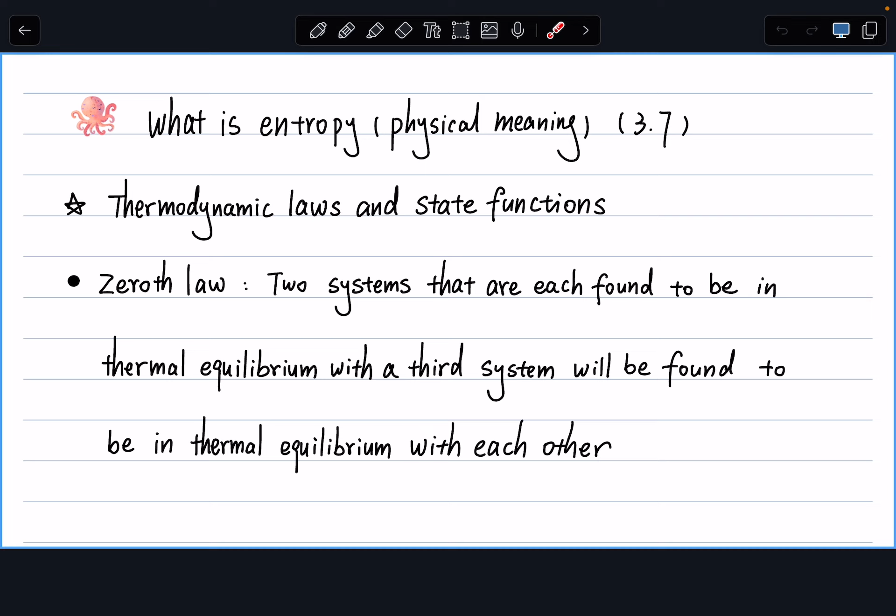And then from these chapters, basically every chapter in 1 to 3, we have one state function relevant to a law of thermodynamics. So these laws of thermodynamics, we just accept them to be true. It's not our job to prove that these laws are correct. So in chapter 1, we went over what we call the zeroth law of thermodynamics, stating 2 systems that are each found to be in thermal equilibrium with a third system will be found to be in thermal equilibrium with each other, right? So in order to better describe the zeroth law, we define temperature.

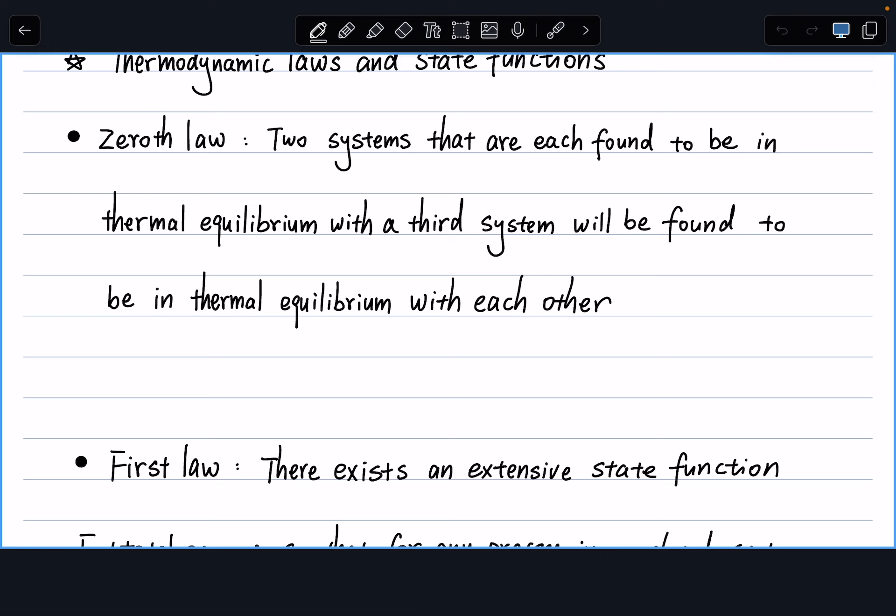Temperature itself is a state function, right? So you can define the temperature of a thermodynamic state. And if 2 systems have the same temperature, you can say they're in thermal equilibrium with each other. So that's our zeroth law of thermodynamics. From there, we also went over the discussion of the equation of state. So we have an equation of state that's telling us what's the relationship of pressure, volume, and temperature for a specific thermodynamic state, for a specific substance.

So you can have ideal gases, you can have van der Waals gases, you can have liquid, you can have solid. So whatever you're trying to describe, there always exists some kind of relation between pressure, volume, and temperature. We went over the derivation to show only 2 partial differential equations or 2 experiments are needed to determine the equation of state. So these are experimentally determined equations of state. They're specific to the substance we're studying, like ideal gases, real gases, liquid, solid, whatsoever.

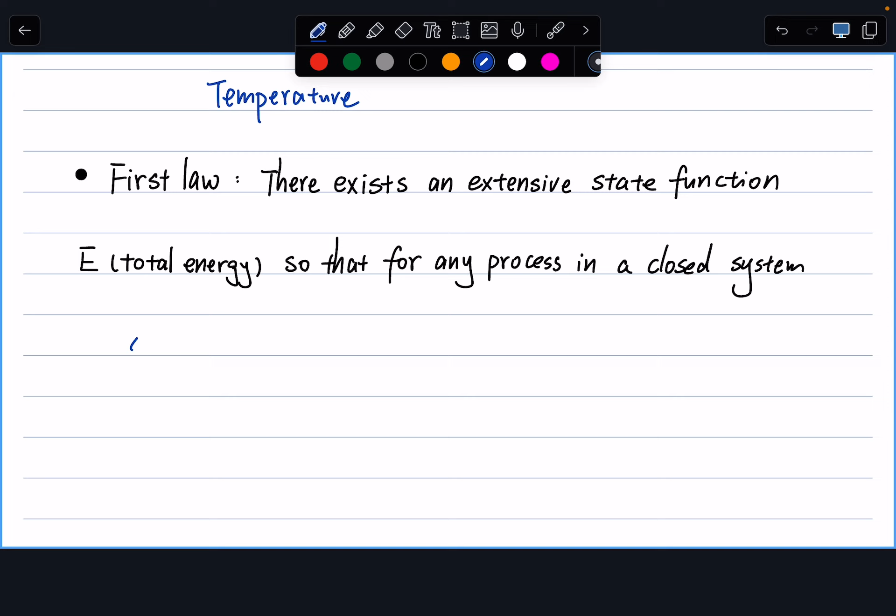So that's chapter 1. And then moving on to chapter 2, we now have a focus on the first law of thermodynamics. Basically in the first law, we say there exists an extensive state function, energy or total energy, so that for any process in a closed system, we have delta E equals Q plus W. Okay, so this one should be delta E equals delta U plus delta kinetic plus delta potential. And these 2 are 0 if we say it's at rest, no external field. And thus, for thermodynamic purposes, we have delta U equals Q plus W for a closed system at rest and no external fields.

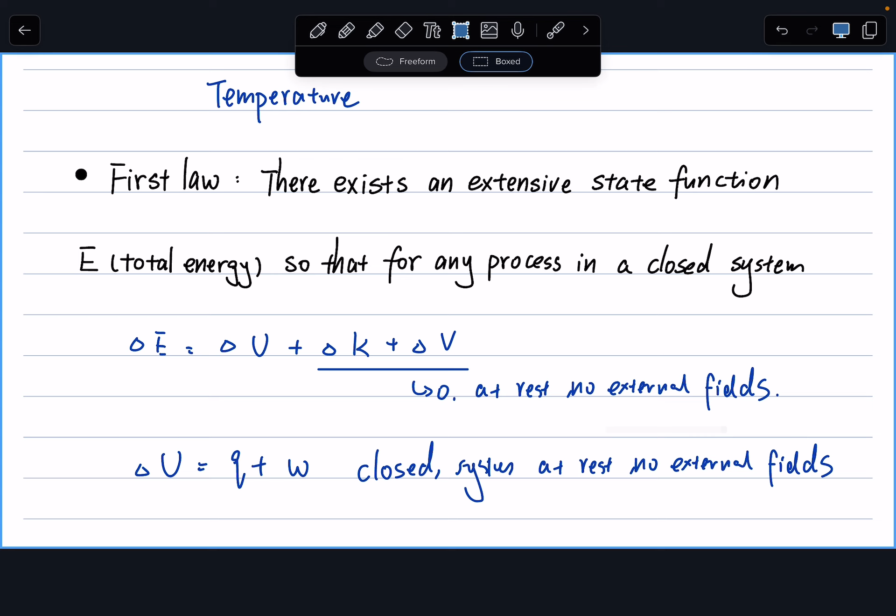And also, since we know energy is conserved, we have delta E of the system plus delta E of the surrounding must add up to be 0. So energy is conserved. And then in chapter 2, we started from the first law of thermodynamics. We have internal energy. We also have enthalpy. So we have H equals U plus PV. And in the process, we went over how to calculate work and what heat and work mean. So these are the line integrals.

So the most important thing of the second chapter is to know the difference of state function versus line integral. Like what's the actual definition of these terms? And what are the properties of these state functions and line integrals? So we'll do some true and false problems later on and see how we can ask questions on these kinds of conceptual topics. So that's our second chapter.

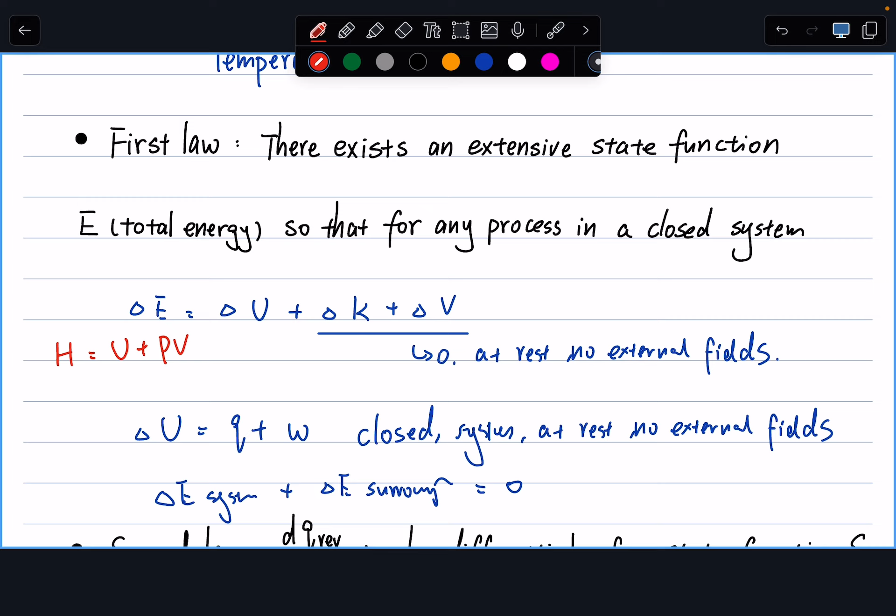And then from there, we also moved on to discuss how to calculate delta H and delta U, also Q and W, for different thermodynamic processes. So at the end of chapter 2, we did a bunch of derivations, right? So for isothermal processes, how do you calculate reversible PV work? You could use W equals negative PdV. Or for a cyclic process, you know delta U equals 0, you know what work is, how to derive Q, right? So these are the general strategies I expect you to know, which is how to calculate delta H, delta U, Q, and W for a defined thermodynamic process.

And then we moved on to our chapter 3, where we started from heat engines. Right? So the initial idea of the second law of thermodynamics started from chemical engineers who want to make a heat engine that's as efficient as possible, to translate all the heat into work. Then we went over the derivation of the Carnot principle, stating the reversible cycle as the most effective cycle, using the second law of thermodynamics.

And then from there, we built the Carnot cycle, which is a reversible cycle containing 2 isothermal steps and 2 adiabatic steps, all reversible. And from there, we find out there must exist some kind of state function S, whose differential, dS, equals dq reversible over temperature. We later generalized that observation into any kind of reversible cycle and defined entropy as our state function.

And in our last lectures, last Friday and this Monday, we went over calculations of how to calculate delta S for different thermodynamic processes. Like, what if it's a reversible phase change? What if it's reversible? What if it's an irreversible change of thermodynamic state? You can build reversible paths so that you can calculate the delta S of the entire process.

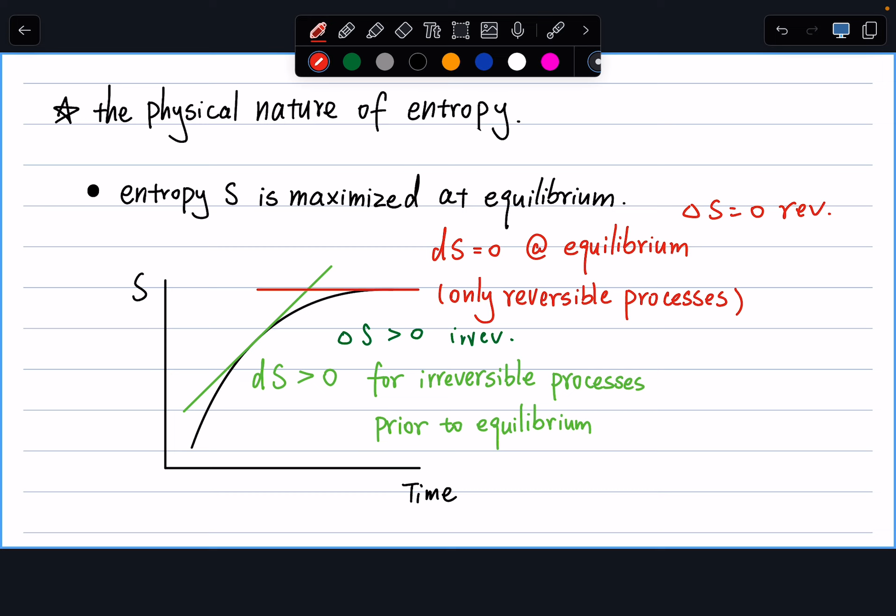So from here, we then make the hypothesis of, well, on top of entropy, what else is maximized at equilibrium? And then we used our mixture of ideal gases as an example to derive what else can be maximized at equilibrium. So in this process, remember we started with molecule D and molecule E separated in 2 different tanks. Then we remove the partition and allow them to freely move around.

We did some derivation, and that part of the derivation is conceptually important, but I don't expect you to know how to get to the conclusion that S equals k log P plus A, where P here is probability, and A here is our constant. k is also a constant. Right. So that's pretty much where I left off.

But I want to revisit this problem of actually solving what is the delta S of this mixing process using probability theory, and then compare that result with something that we saw before, which is using the thermodynamic relations, and see what exactly is the relationship of these k and A. What exactly is that constant? How is that related to some of our thermodynamic constants? So let me just write out what we have derived in our last lecture. Using thermodynamics, this is what we find.

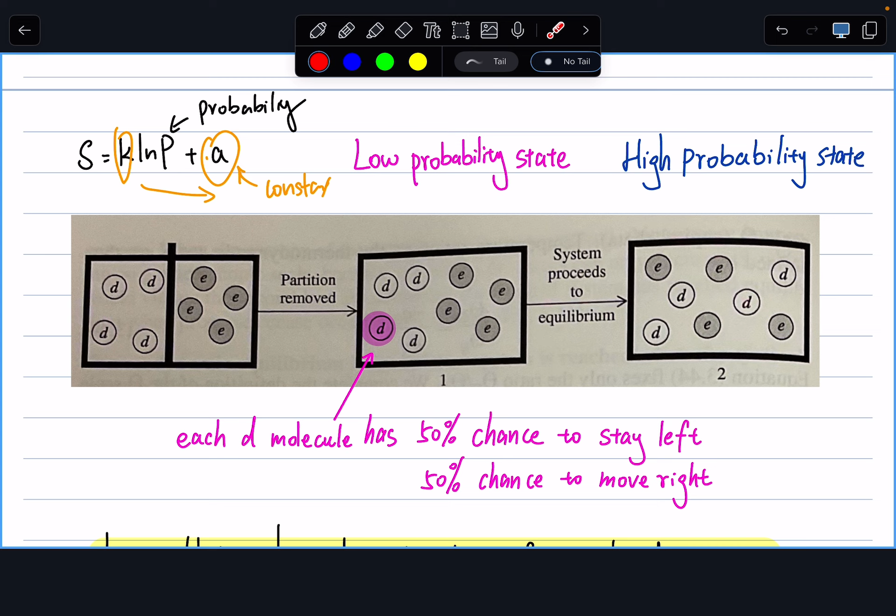All right. So that's a quick refresher on what we discussed last lecture. And I hope by now you have a good understanding of what entropy is. So when people ask you what is entropy, what do we know about it? It's a form of probability. And entropy maximizes at equilibrium. That's all. All right, so let's get to some practice problems for your midterm exams.

These are true and false problems you see often in your textbook. These are very educative, I would say, kind of conceptually challenging. When you read it through, you want to make sure you don't make any assumptions. In my true and false questions, I'll make sure I give you any assumptions I wish you to know. Otherwise, do not make any assumptions when working on true and false problems. All right. So let's read it together and see how we do it.

First one, we have delta H is a state function. Whenever you read this kind of statement, you want to go back and check the actual definition of a state function. Reading that with you, a thermodynamic system in a given equilibrium state has a particular value for each thermodynamic property. These properties are state functions. So a state function describes a specific thermodynamic state. Now looking at it here, is delta H a state function? Raise your hand if you think yes.

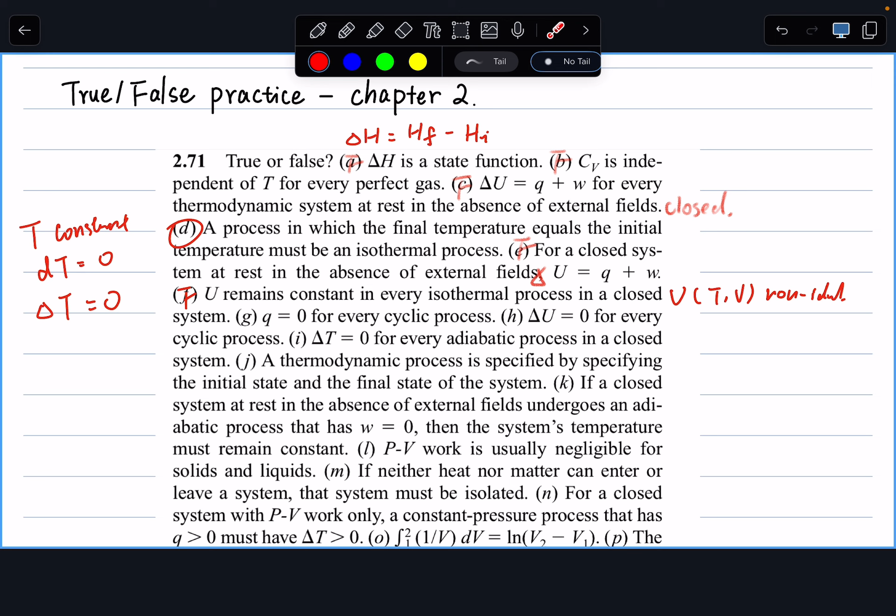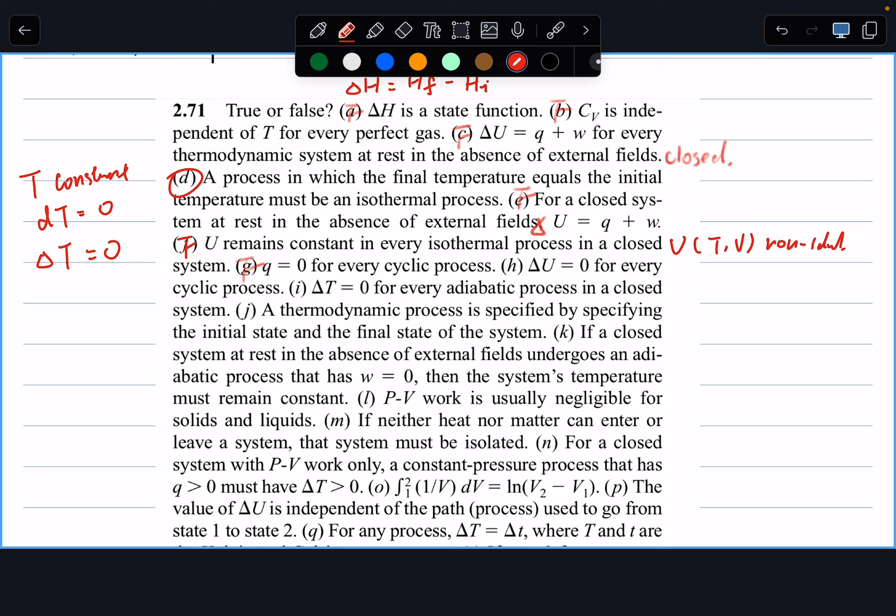All right, next up. Q equals 0 for every cyclic process. This one is kind of obvious: it's false, because Q, or heat, is a process-dependent function, or a line integral, so it's path-dependent. And then let's look at H. Delta U equals 0 for every cyclic process. True? False?

Yeah. I want to say true because I feel like... Yeah, it is true, right? Because it's a state function. So delta U equals 0 for every cyclic process. As long as it is a cyclic process, by definition, we know it has the same initial and final state. So delta U must equal 0. Same applies to delta H and delta S, or delta T, delta V. So if it's cyclic, your initial and final thermodynamic state are exactly the same.

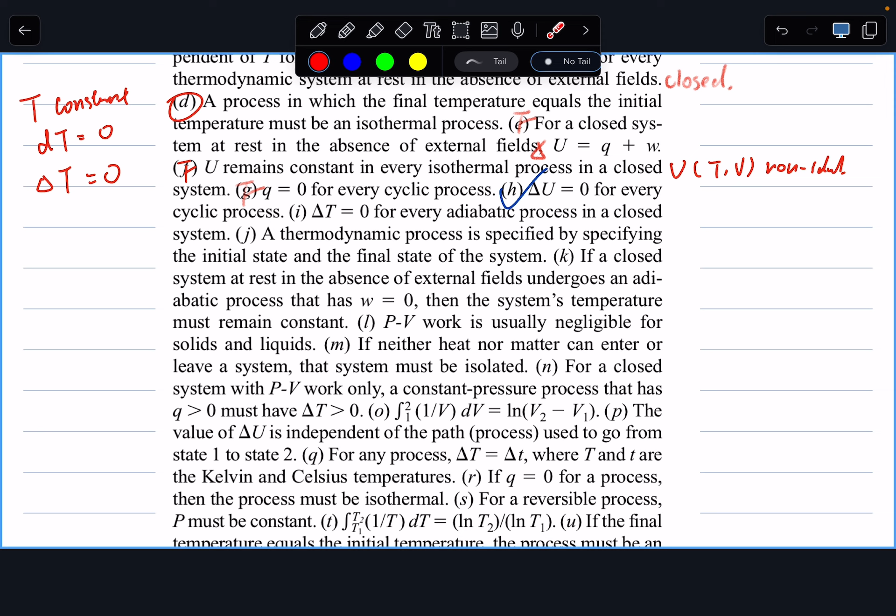Yes? And then what about, well, this kind of goes back to the isothermal question, the delta U, that's true equaling 0, but then dU? This one, no, because only for ideal gases do you know how your internal energy changes with temperature. For a non-ideal gas, your internal energy is also a function of volume, so you don't know how your internal energy is going to change with respect to temperature.

All right, next up. Delta T equals 0 for every adiabatic process in a closed system. So this is one of those questions asking you to get familiar with these vocabularies, right? Delta T is talking about change of temperature. Adiabatic is telling us Q equals 0. Now, Q equals 0 doesn't necessarily mean your delta T is 0. We went over the derivation where you can have expansion of gases where your system is doing work on the surroundings. And so delta T can be 0, but you need heat input.

Or in this case, we have adiabatic, and for reversible adiabatic processes of ideal gases, remember we derived T2 over T1 equals V1 over V2 to the R over CV,m, right? So it's not.

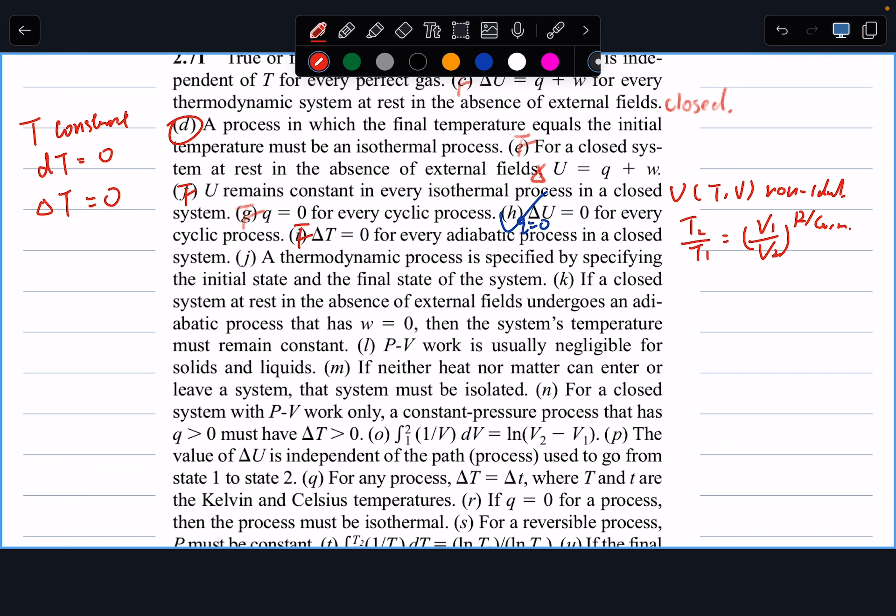Question J. A thermodynamic process is specified by specifying the initial state and final state of the system. So think about it. What is a thermodynamic process? Like the one we just did, right? For an adiabatic process, only knowing the initial and final state, is it good enough to identify an adiabatic process? Obviously not, right? So you want to know what the path is.

So for this kind of question, you want to think, okay, let's say a thermodynamic process is specified by specifying initial and final state. Let's just imagine any kind of thermodynamic process, like adiabatic, isothermal, whatsoever. And you'll find out all of them define some kind of limitations along the pathway, not only the initial and final state. And some of these questions are effectively the same question, just different wording.

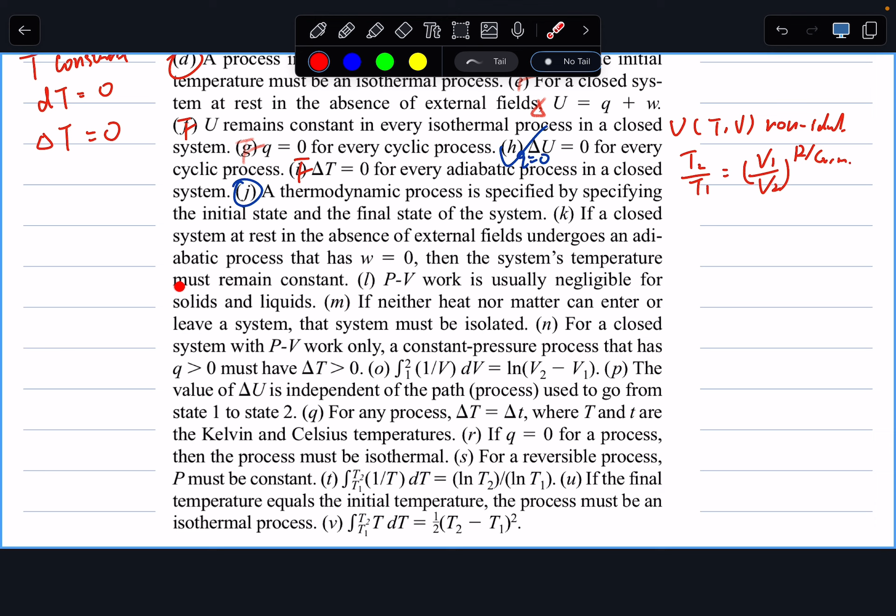Okay, next up. If a closed system at rest in the absence of an external field undergoes an adiabatic process that has work equal to 0, then the system's temperature must remain constant. I'm going to highlight it for you. Any thoughts? So let me just write down what I think when I'm reading this question. A closed system at rest in absence of external field. Okay, so reading it, I know delta U equals Q plus W, my first law of thermodynamics. It undergoes an adiabatic process. Okay, so we have Q equals 0 and work equals 0.

So from reading the sentence, we know delta U equals 0 for this system. But then it says the system's temperature must remain constant. So do I know about temperature? I don't, right? Because we didn't specify it being an ideal gas. So I don't know how my internal energy is going to change with respect to temperature. This is what's going on in my mind when I'm reading this kind of question. Every time you encounter sentences, you translate them into equations that we went over in class based on those conditions. And then things become quite obvious. And that's false.

Next up, PV work is usually negligible for solids and liquids. Yes? Quick question. So when you say that you don't know how U is dependent on T because it's not ideal, is that because in a non-ideal gas it's also dependent on the volume? Yeah, that's it. Okay, so if it were to say both temperature and volume or something, then it would... Well, if your temperature and volume are both held constant and you have an equation of state holding a relationship between T, P and V, do you really have a state change? Right? Then you'll have the same initial and final state, then delta U obviously equals 0.

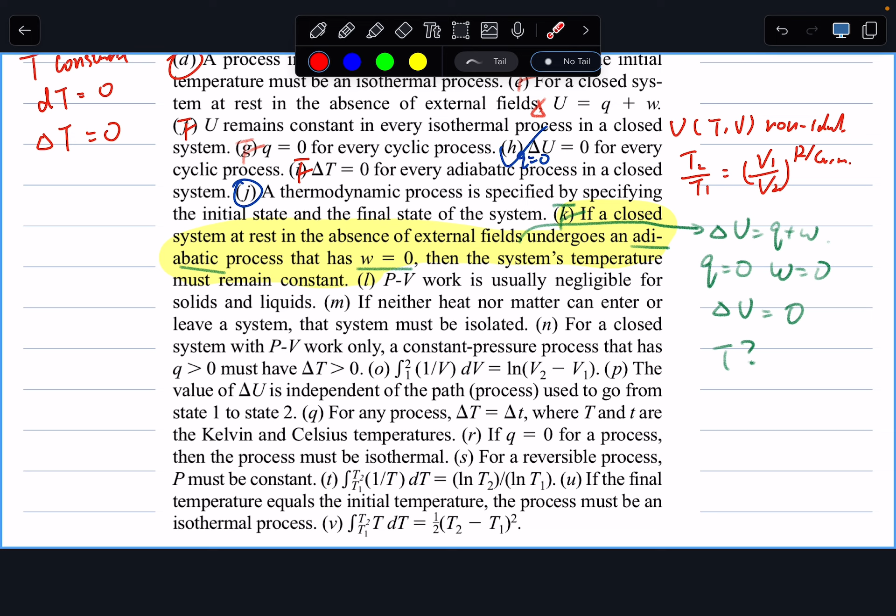So for these true and false questions, I shared with you what I'm thinking when I'm working on it. I also posted my way of thinking in our annotated notes. So go back and try it yourself and see what you get from it. And now let's look at a more comprehensive style of question.

So this question is one of those things that when you first read it, you'll feel like, okay, this is an unfair question. We didn't go over this cycle in class. But you actually have everything you need in order to solve this problem. So let's look at it. In class, we went over the Carnot cycle, a cycle that consists of 2 reversible isothermal processes and 2 reversible adiabatic processes, right? Remember we did the assignment of Q and W on the board together.

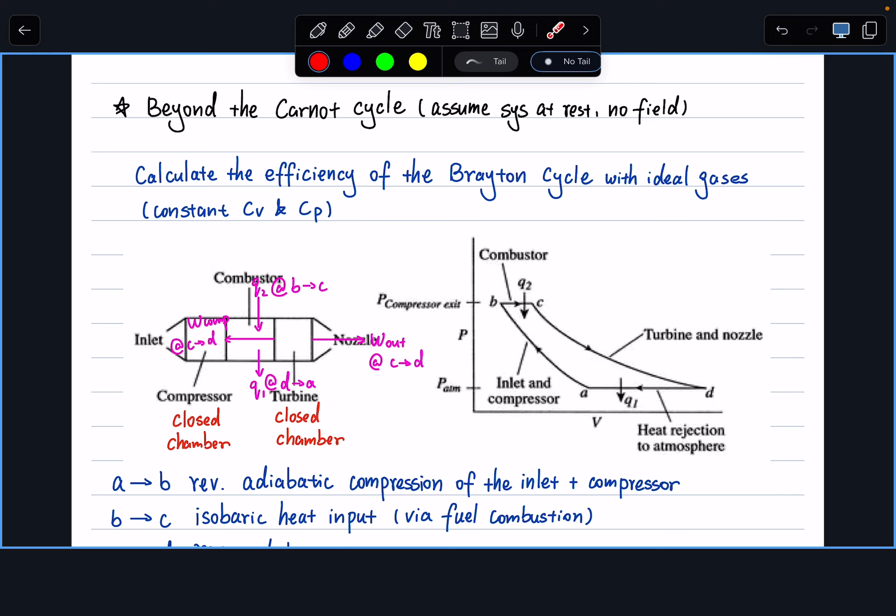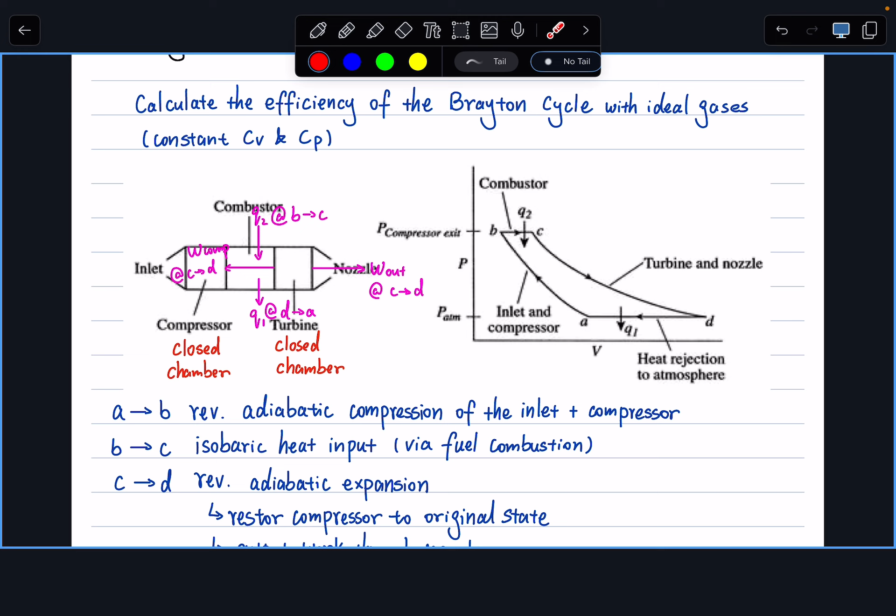We also know that the efficiency of any heat engine is defined as the absolute value of W over QH. Or the other way to put it is your heat engine is absorbing heat from a hot reservoir, transforming that heat into work. And efficiency tells us how much work comes out from that QH. So in this question, we're thinking about a different kind of thermodynamic cycle, called the Brayton cycle, which is actually used a lot in jet engines.

All right. Looking at how it is set up, on the left we have an inlet, and on the right we have a nozzle. And in here, you have a compressor and a turbine. We're saying in the two closed chambers of compressor and turbine, we have ideal gases.

And this cycle goes like this. We start from a reversible adiabatic compression at the inlet of the compressor. So basically, we're compressing the gas inside the compressor. That's our first step, from A to B. That's a reversible adiabatic compression, so volume is going down. During that process, it's adiabatic, volume going down, and your pressure is increasing.

Next up, from B to C, we have an isobaric heat input. We didn't specify it being reversible though. So we're just saying there's some kind of heat input to the cycle. Probably you have some kind of fuel burning in the combustor, and that heat got transferred into your compressor. So on the PV diagram, the temperature of point B increases to some point C in an isobaric fashion.

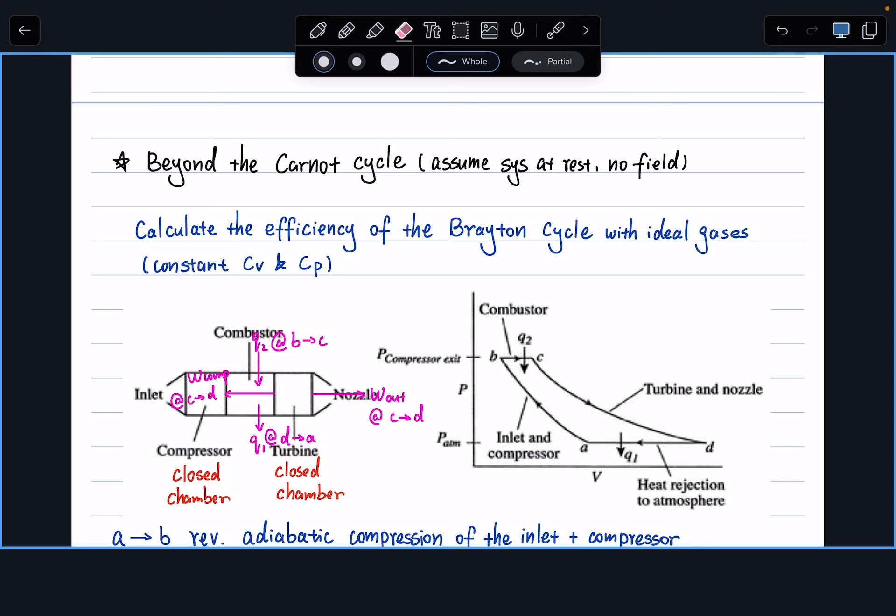One of the things we can ask you is, let's say I remove the A, B, C labels on the figure, and I tell you what is going on, A to B, B to C, C to D, D to A, and ask you to label the figure and tell me what's A, B, C, and D. That's one way I can ask you. Or I can give you the figure and tell you these two are adiabatic, and ask you to describe what is going on between B and C. So there are different ways we could ask you.

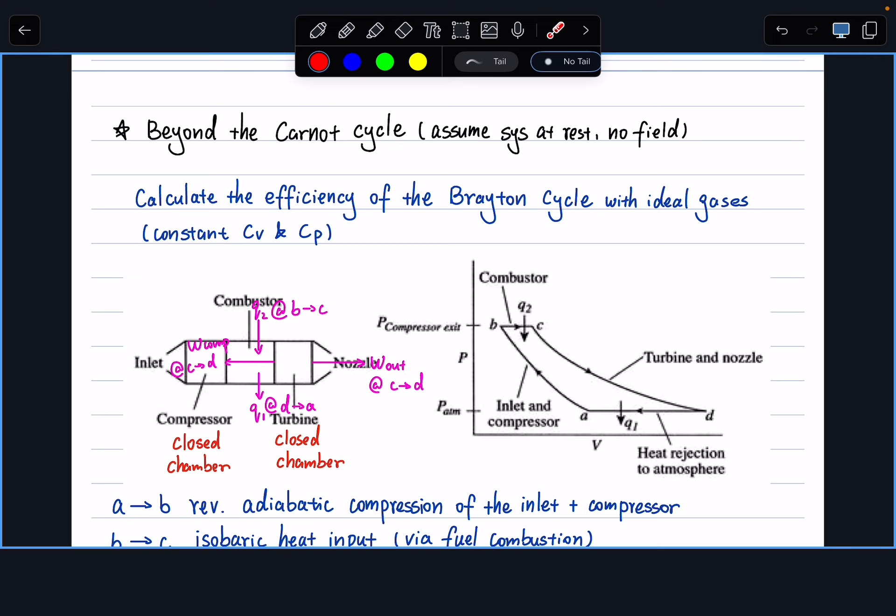But for this question, I'm telling you everything. I'm giving you the figure. I'm telling you what's going on. Now, can you calculate the efficiency of the cycle, assuming we have constant Cp and Cv for the ideal gases? And I want you to express your answer in terms of the 4 different temperatures A, B, C, D on the figure. All right, so I'm going to do that on the board with you.

So first of all, what do we know? We know that in this case, when we're talking about my system being my compressor and my turbine, we have my closed, non-isolated system. Well, again, we can assume it's at rest. The entire system is at rest, and also no external field.

So if we're looking at the entire cycle, well, we have delta U equals to Q plus W. Or if we're looking at my delta U of my entire A, B, C, D, the change of my internal energy must equal to 0. So far, so good. It's pretty straightforward, right? You read the question, we say you can use the first law of thermodynamics. You have your first law of thermodynamics. You have the cyclic process, delta U equals to 0.

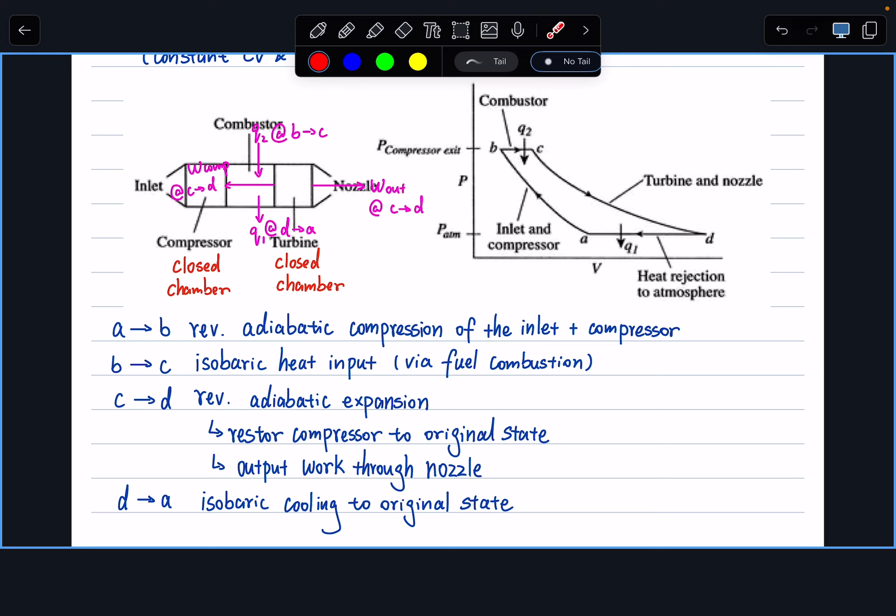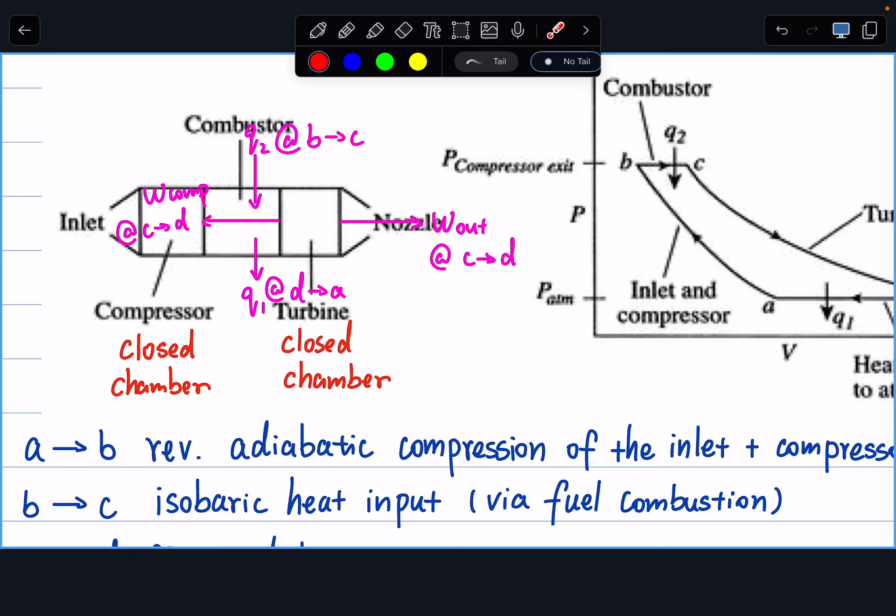What else do we know? Now, we also have my delta U equals to Q plus W. So we want a relationship between my heat and work. Now, looking at the figure, what do we have? So in process B to C, remember we have the combustion. We have the combustion of energy input into my system. That's our B to C, which is my isobaric heat input, right? And then from my D to A, that's my isobaric cooling down. So in two processes, we have Q1 and Q2 associated with it.

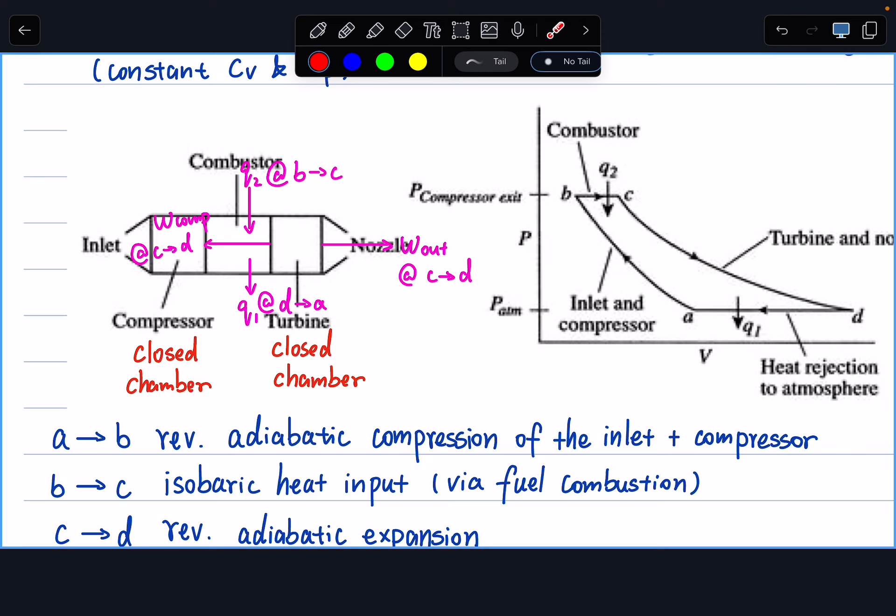Now on the figure, you can also read it to say like here, we have our Q2, and here we have our Q1. So total heat equals to Q2 plus Q1, where Q2 is this heat flow into the system. And my Q1 is my heat, the system to the surrounding.

And since my delta U equals to 0, Q plus W equals to 0, we can write my W total equals to delta U minus Q2 plus Q1 equals to negative of Q2 plus Q1. Right. And in here, the W total, we're talking about the work that's being done out from the system. So that's the amount of work your system is doing on the surrounding, and that's why it's a negative number.

Or since we're talking about the efficiency, we want to know how much work, what's the absolute value that's being outputted. So we also can put that as your absolute value. Yes? Should it be Q2 minus Q1 in the expression if you're taking the negative out?